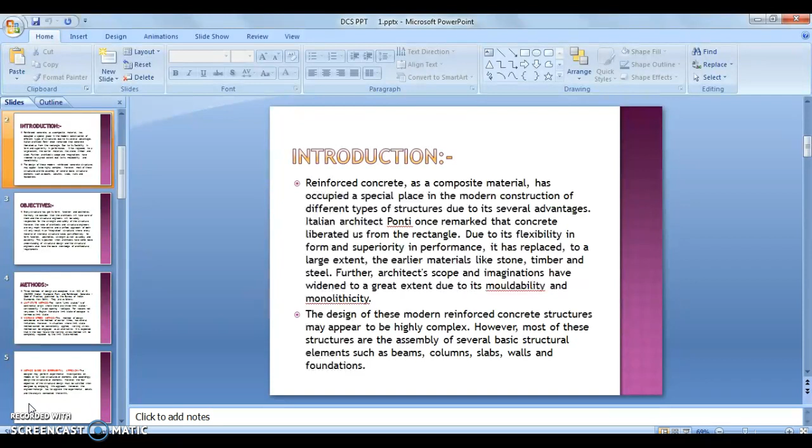Objectives of design of concrete structure. Every structure has got its form, function, and aesthetics. Normally, we consider that the architects will take care of them and the structural engineers will be solely responsible for the strength and safety of the structures.

However, the roles of architects and structural engineers are very much interactive, and a unified approach of both will only result in an integrated structure where every material of the total structure takes part effectively for form, function, aesthetics, strength, as well as safety and durability. This is possible when architects have some basic understanding of structural design, and the structural engineers also have the basic knowledge of architectural requirements.

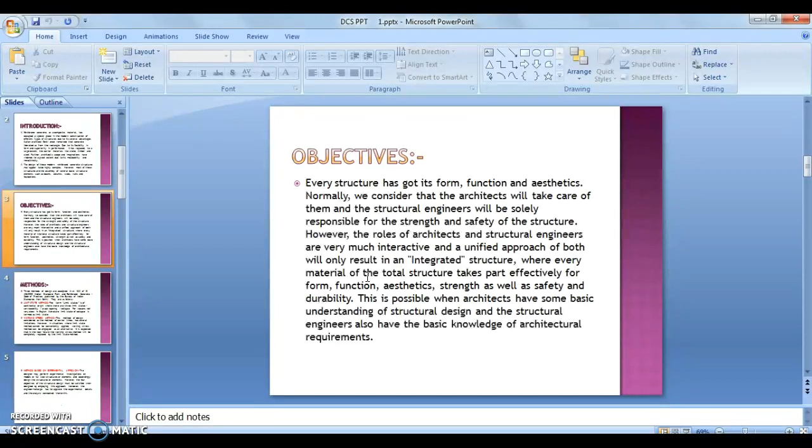When it comes to methods of design of concrete structure, there are three methods. One is limit state method, another one is working stress method, and another one is methods based on experimental approach. The term limit state is of continental origin, where there are three limit states: serviceability, crack opening, and collapse. For reasons not very clear in English literature, limit state of collapse is termed as limit state.

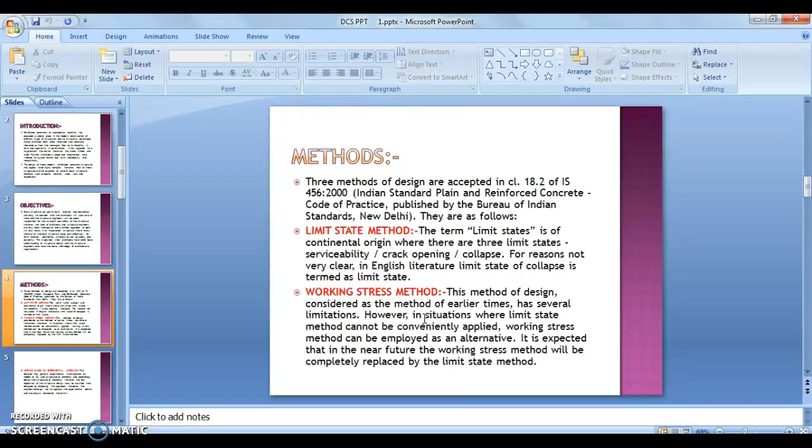Working stress method. This method of design, considered as the method of earlier times, had several limitations. However, in situations where limit state methods cannot be conveniently applied, working stress method can be employed as an alternative. It is expected that in the near future, the working stress method will be completely replaced by limit state method.

When it comes to methods based on experimental approach, the designer may perform experimental investigations on models of full-size structures or elements and accordingly design the structure or elements. However, the four objectives of the structural design must be satisfied when designed by employing this approach. Moreover, the engineer in charge has to approve the experimental details and the analysis connected therewith.

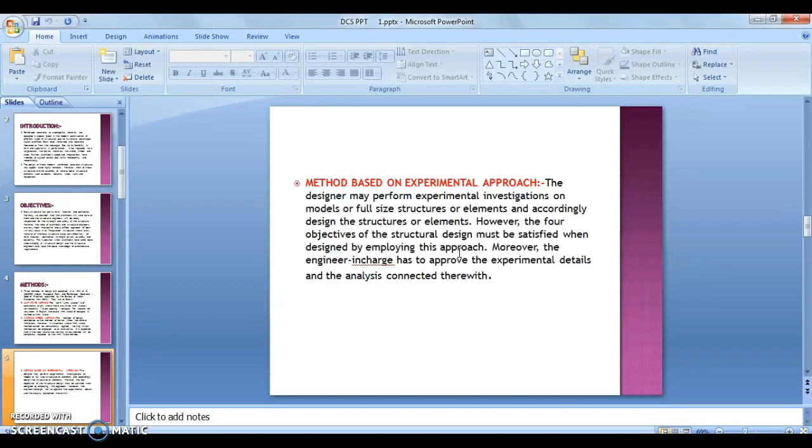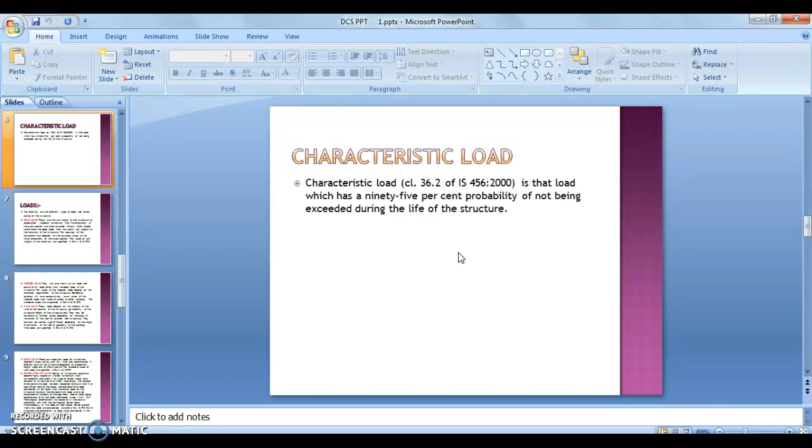Then comes characteristic load. The characteristic load, given in clause number 36.2 of IS 456:2000, is that load which has a 95% probability of not being exceeded during the life of the structure. Then comes different types of loads. There are many types of loads like dead load, imposed load, wind load, snow load, combination of loads, etc.

Dead loads. These are the self-weight of the structure to be designed. Needless to mention that the dimensions of the cross sections are to be assumed initially, which enable us to estimate the dead loads from the known unit weight of the materials of the structure. The accuracy of the estimation thus depends on the assumed values of the initial dimensions of the cross section. The values of unit weight of the materials are specified in Part 1 of IS 875.

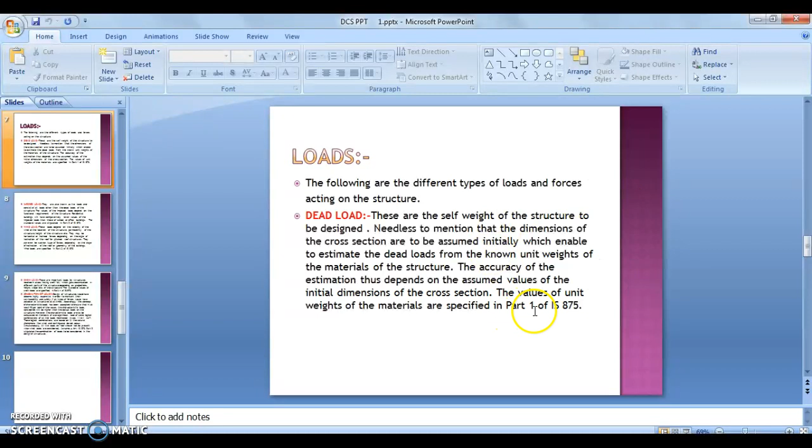Imposed loads. They are also known as live loads and consist of all loads other than the dead loads of the structure. The values of the imposed loads depend on the functional requirements of the structure. Residential buildings will have comparatively lower values of the imposed loads than those of school or office buildings.

Then wind loads. These loads depend on the velocity of the wind at the location of the structure, permeability of the structure, height of the structure, etc. They may be horizontal or inclined forces depending on the angle of inclination of the roof for pitched roof structures. They can even be suction type of forces depending on the angle of inclination of the roof or geometry of the buildings.

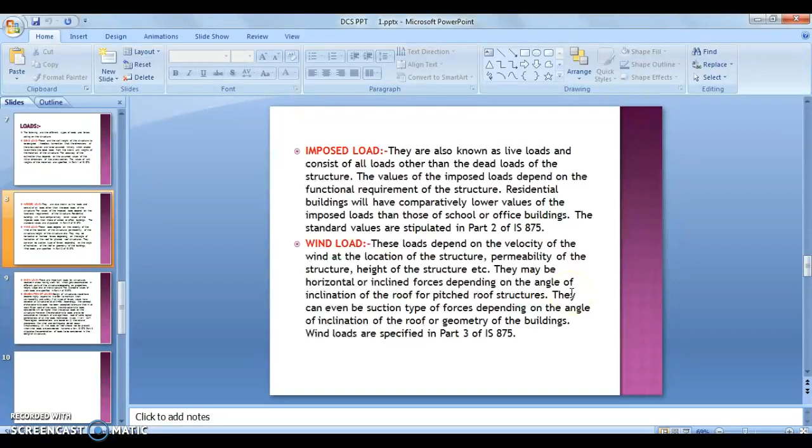Then comes snow load. These are important loads for structures located in areas having snowfall, which gets accumulated in different parts of the structure depending on the projections, heights, slopes, etc. of the structures. Combination of loads. There are many combinations done, like dead load and live load,

etc. Design of structures would have become highly expensive in order to maintain their serviceability and safety if all types of forces would have acted on all structures at all times. Accordingly, the concept of characteristic loads has been accepted to ensure that in at least 95% of the cases, the characteristic loads considered will be higher than the actual loads on the structure.

However, the characteristic loads are to be calculated on the basis of average or mean load of some logical combinations of all the loads mentioned. These logical combinations are based on natural phenomena, like wind and earthquake do not occur simultaneously. Live loads on roofs should not be present when wind loads are considered.